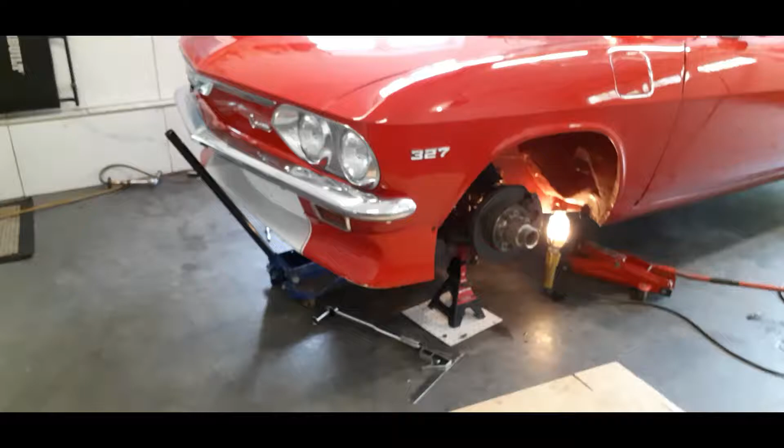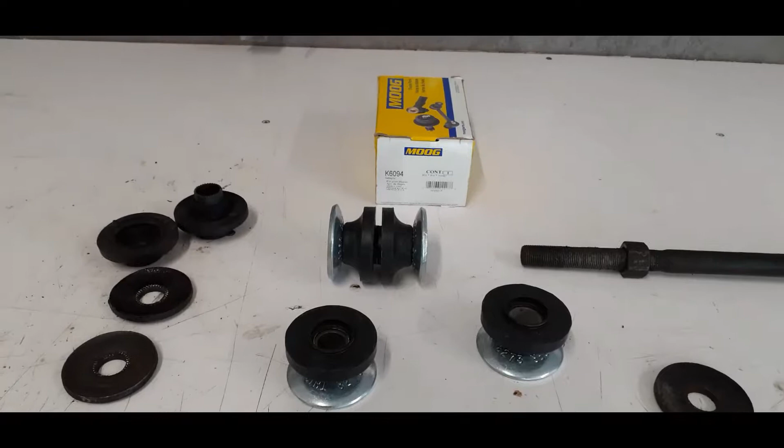Hi, today I'm going to replace the strut rod bushings on my 66 Corvair. I've just purchased the Moog K6094 improved design bushings, which they share with the Chevy II model also.

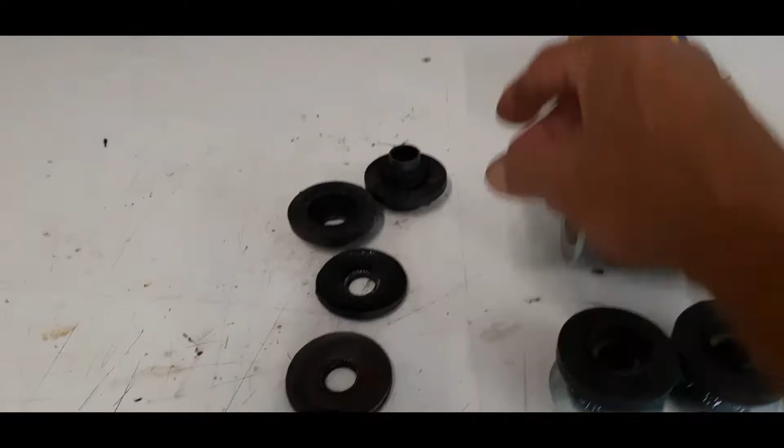There are some physical differences here. One, the rubber is a lot stiffer. The sleeve actually captures the washer so it becomes like two pieces, and when the whole assembly is collapsed, with the sleeves in contact with each other, it's 2.2 inches. Over here, the GM standard design has one side with a sleeve, the other that slips over, and then two large washers. But when this is all in contact, it's 1.9 inch.

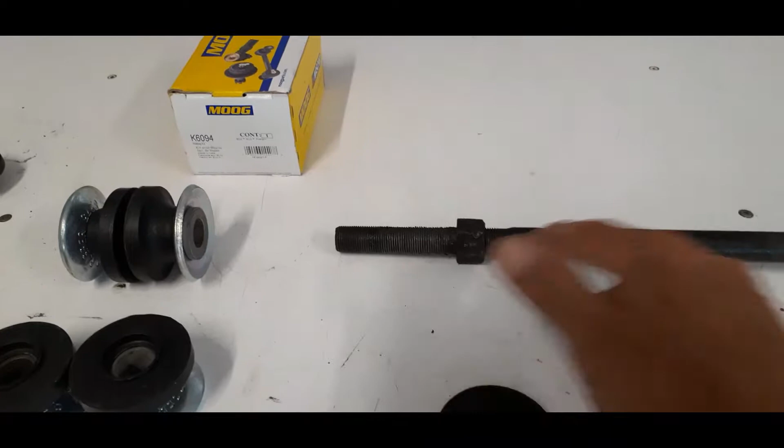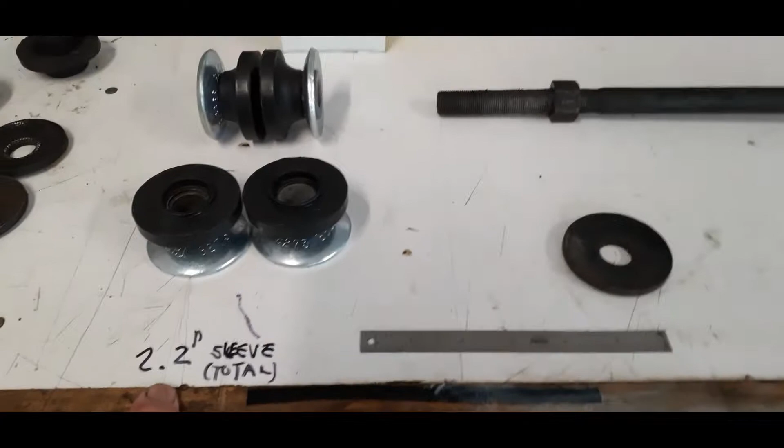So right away, we're going to have less adjustment on this threaded rod because the bushing is just wider. This is an 11/16 by 18 pitch threaded rod, which means that 0.3 inch difference works out to almost 5.5 threads.

So if you want to keep your alignment where it is, the easiest way is to back off these nuts 2 3/4 turns, and once you tighten the other side up, it should put the middle section exactly where it was with the older bushings.

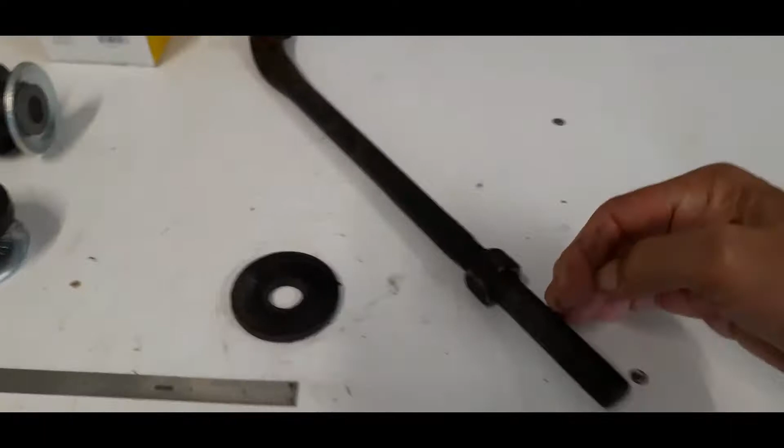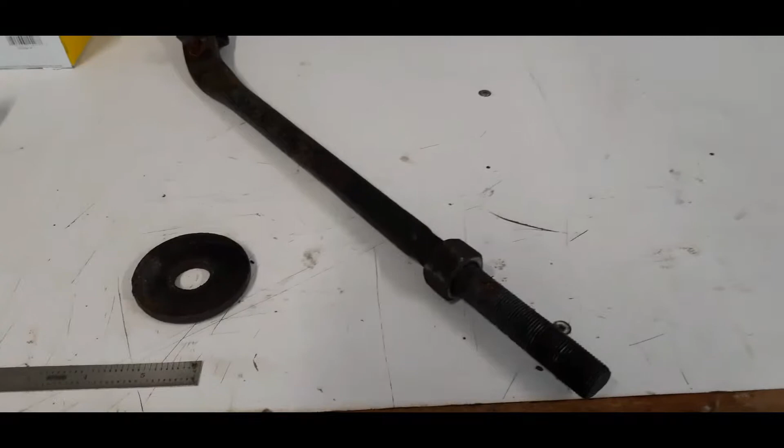That's in theory. In practice, the forward side of those bushings - this fits in the car like this - this side of the bushing is always crushed, because when the car brakes, the rod wants to push through the frame. The other way, there's never any strain pulling the wheel forward. So your alignment, your bushings, are never centered.

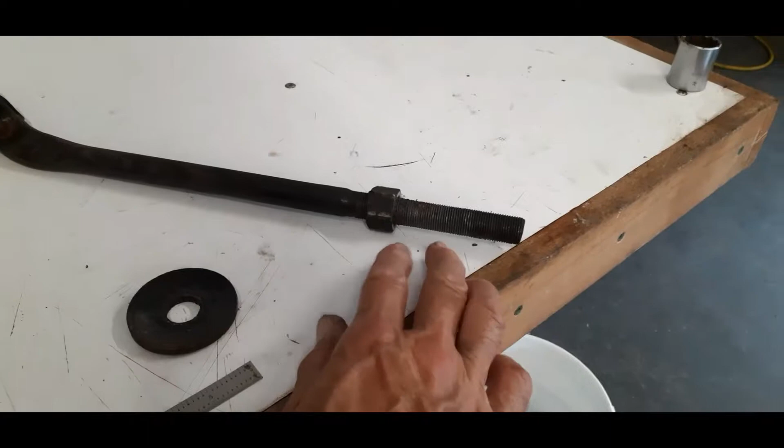If you look at how your bushings are, you'll notice a small distance in the front and a big distance in the back of the rubber, the way the rubber sits. So my theory is to go back 2 3/4 turns on the nut and put everything back together.

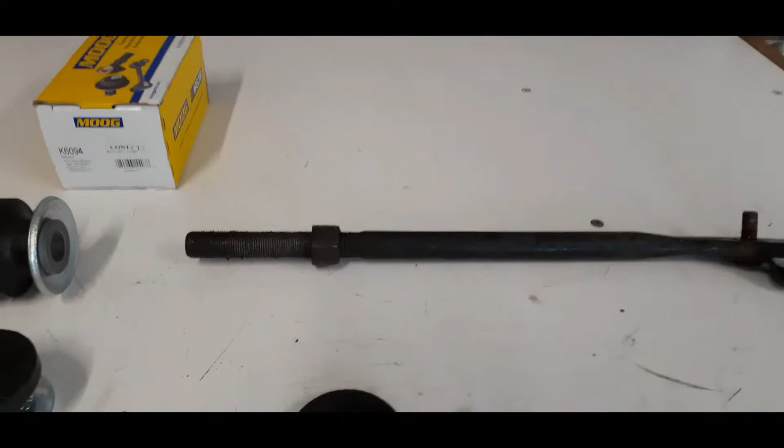This would work if your car had brand new bushings and was just aligned with the old bushings. In practice, it all depends. Last time it was aligned, if your bushings were collapsed, as they always are, then your alignment's not going to work as well as it should.

So what I'm going to do is put my threads half and half, with the same amount of play on each side once it's tight, and then go to the alignment shop. Okay, so let's have a look at the actual job.

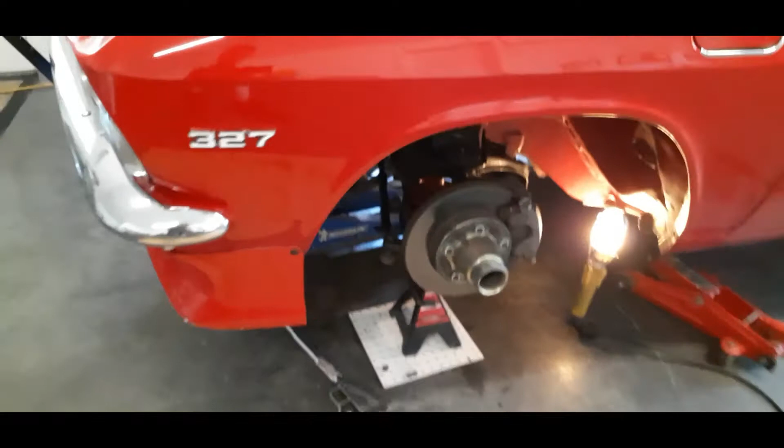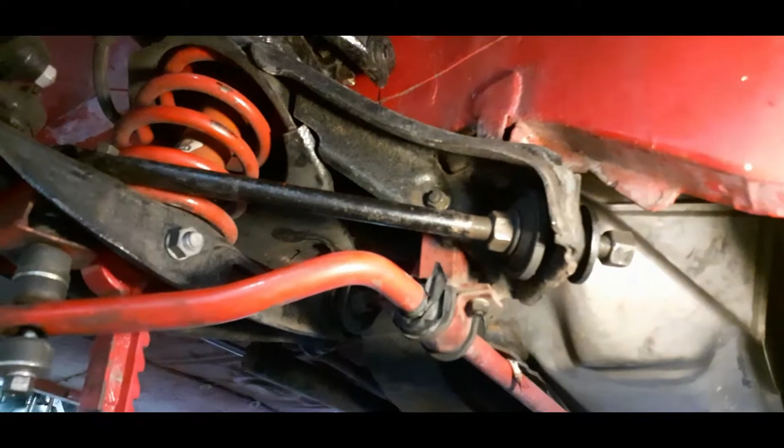First, we remove the wheel. Half the time this breaks, but not everybody does it that way - it makes no difference for what I want to show. Over here, you see I have a sway bar that goes underneath. You probably don't have that, because it's an aftermarket sway bar.

But anyways, to get the strut rod out, you have two bolts. They are 3/8 fine thread, so the nuts need a 9/16 wrench. Be careful with these nuts, because fine thread 9/16 is kind of hard to find - if they're in good shape, keep them securely and reuse them.

Okay, so you can loosen those. Don't take them out all the way, because when you're going to...

Let me fix that a little bit. Well, that didn't work so good, did it? Okay, I'm back. I'm a real pro here.

Okay, so you want to remove that. That's a 1 inch box, or actually a wrench works better, a big 1 inch wrench. But once you loosen that up, if you take out these bolts, the rod's going to want to turn, so that's not going to work. So you can loosen them, or you could do them later.

Remove this, and then remove that - you got your washer and your rubber. Then this pulls out here, and this pulls out like that. And what I was talking about earlier is, if you look how that is, the frame is pushed right up to here, so everything's moved ahead.

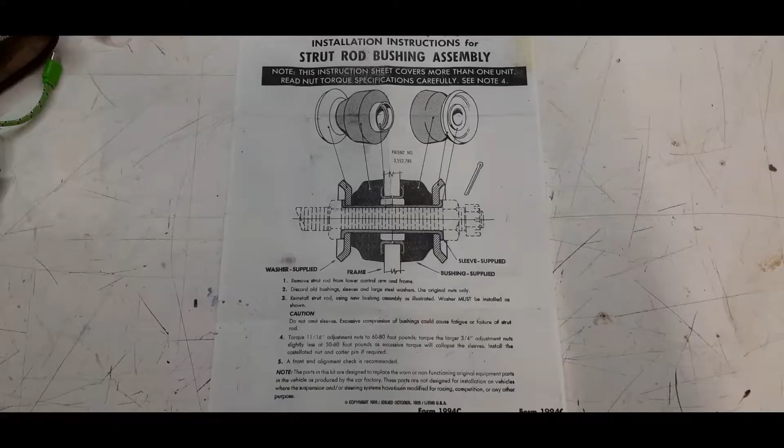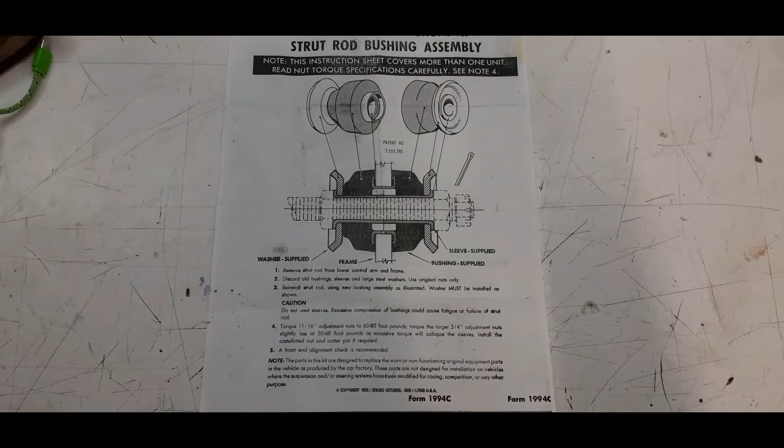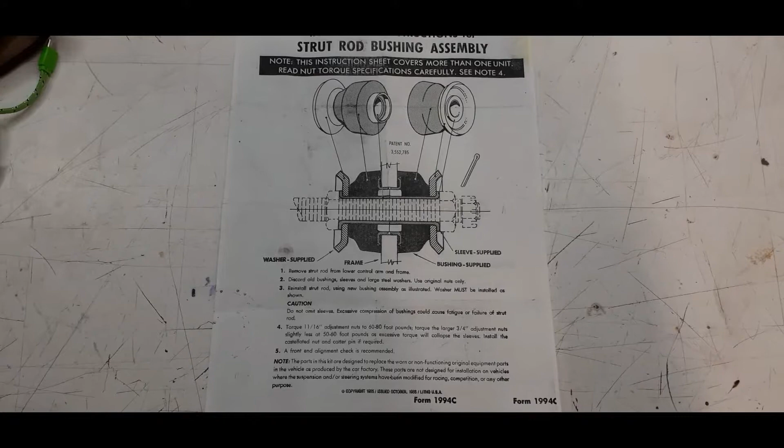Hey, the car is back from alignment and it went well. They just needed a bit of adjustment. I had enough threads on both rods to achieve the proper caster, which I put at 3 positive, because that's what's recommended for street use - not actually 3 degrees in 66 and 2 in 65, but from what I read on the internet, 3 is the way to go.

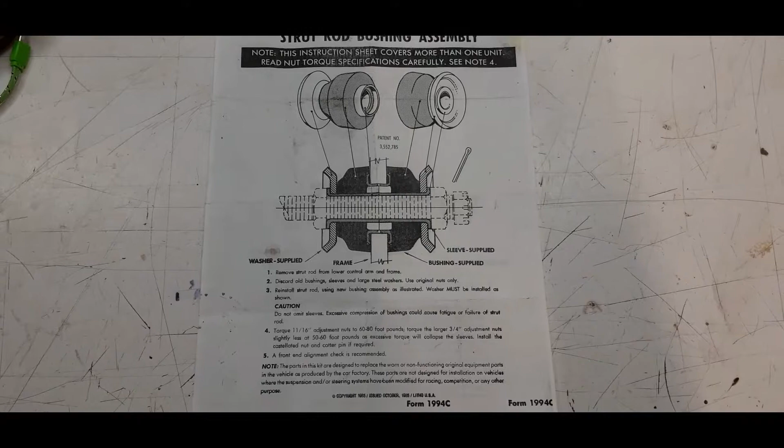The one thing I noticed right away is that I had loosened bushings before - my old ones were pretty bad. So once in a while when I hit the brakes, the car would pull to one side because the rod would compress, since it was loose at the bushing. Now that's all gone - the braking is nice and firm and very straight.

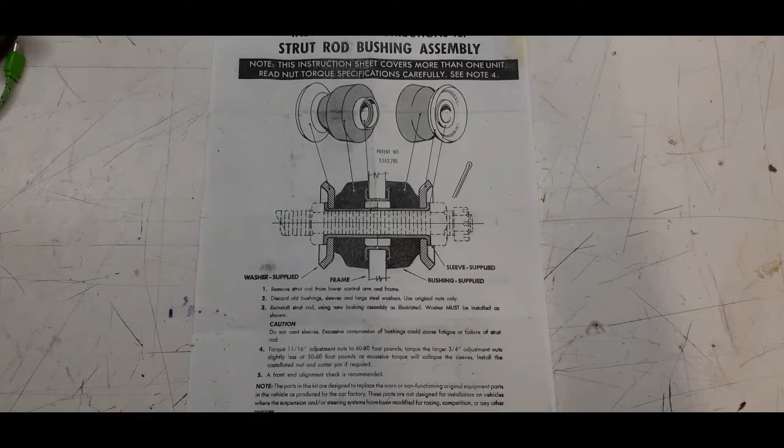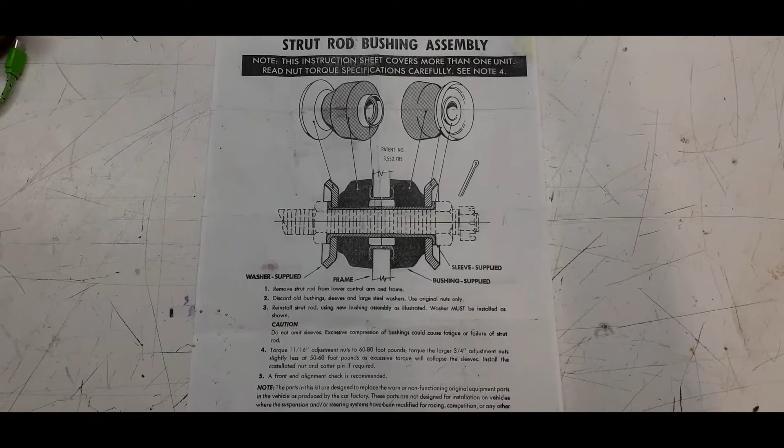Also, when I tightened it all together, you could see that this whole setup is a lot sturdier and more solid than the old way. When you jack the car up, you can see the bushing - the control arm drops down - and you can see that the bushing doesn't get all deformed like the old one did.

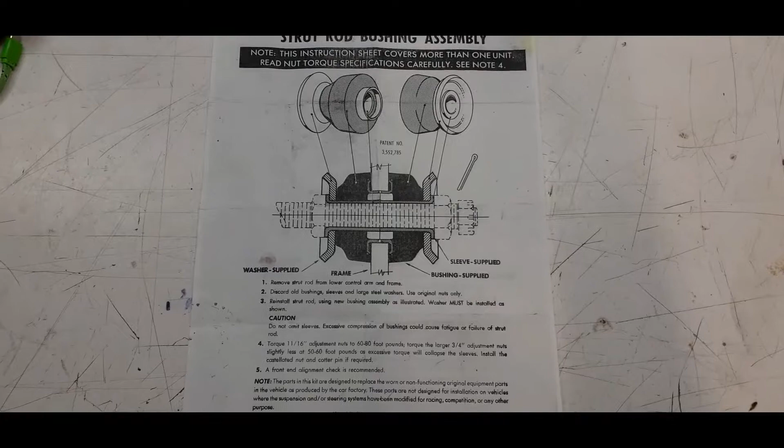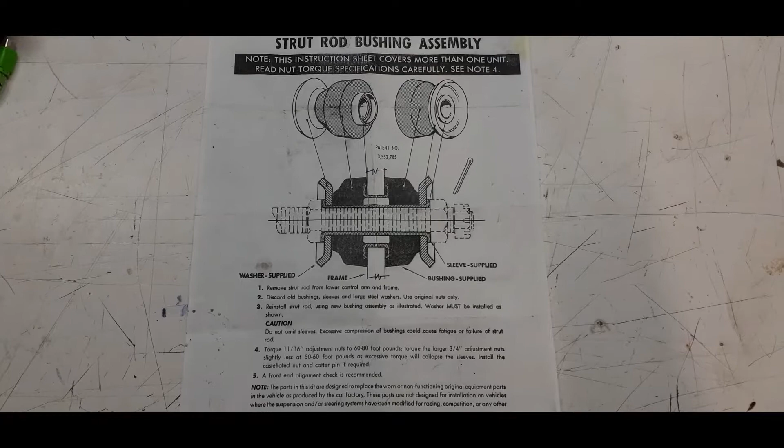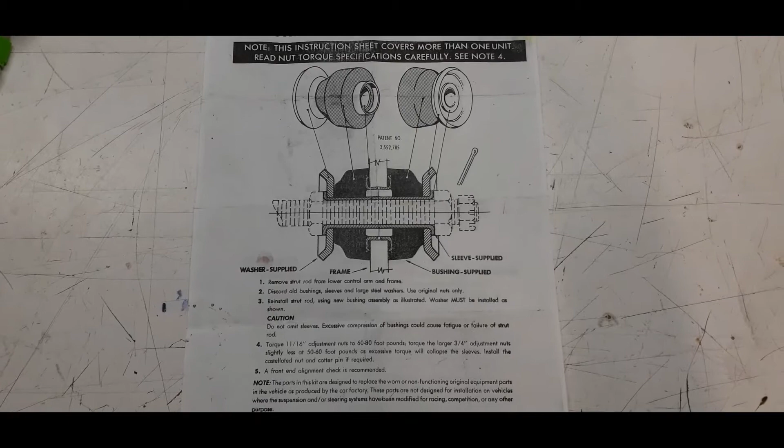I think I forgot to mention, but when you do the strut rod removal, you gotta put a jack stand under the shock base and lower the car onto it, because that compresses the suspension about halfway, and the rod will come out a lot easier. If you don't support the lower control arm, there's going to be too much angle and twist on the rod, and it's not going to come out - you won't be able to put it back in, basically, because it's going to want to pop up.

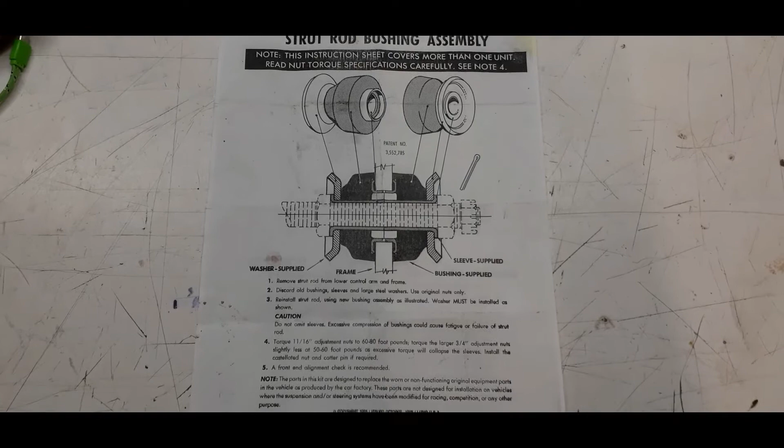All right, so overall, I like the product and I recommend it. All right, bye.